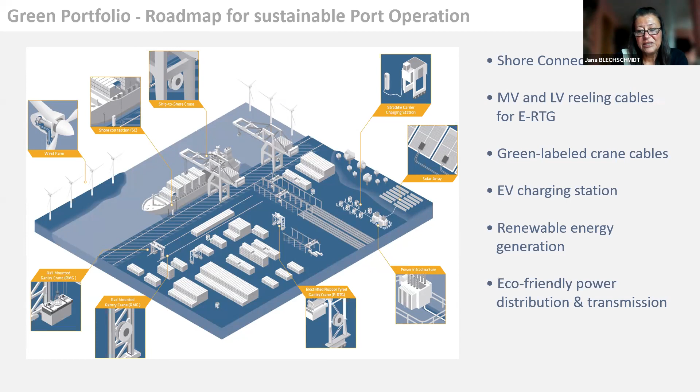Having said that, I would like to draw your attention today to our medium voltage reeling cables, because not all port operations require the same cable solution. That depends very much on the equipment we are driving. From the outside, power cables look pretty commodity and very similar, but looking in, you find a different level of engineering inside the cable, with the focus on best value for money.

Our PROTOLON cable family has a new member, considering applications for older cranes, cranes that are not driving too fast, like mobile harbor cranes that are not running long distances in the port - short for applications with moderate mechanical stress. Our PROTOLON SMK 200 is made and available for these applications. PROTOLON SMK is our classic and most popular reeling cable for operations with high and highest mechanical stresses.

For the increasing number of high-speed applications in the port, such as ASCs and ARMGs, we have developed our PROTOLON SMK HS, with the HS standing for high speed, which is the big sister of our classic PROTOLON SMK. We complete our PROTOLON family with our premium solution, PROTOLON IQ, which is a cable monitoring system that observes itself and its ambient conditions during operation to prevent the cable from failing.

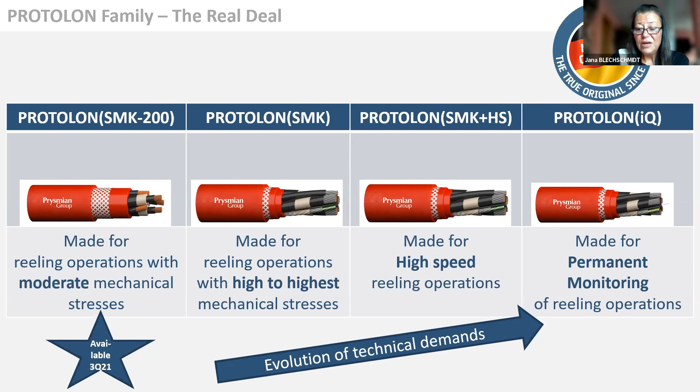The whole PROTOLON cable family is engineered and 100% made in Germany, from the copper drawing and laying to compounding and vulcanization. Now let's take a closer look at each of the products, starting with the new release PROTOLON SMK 200. The design of this cable is optimized for reeling operations with a speed of up to 200 meters per minute, and it can handle a tensile force of 25 newton per square millimeter copper conductor.

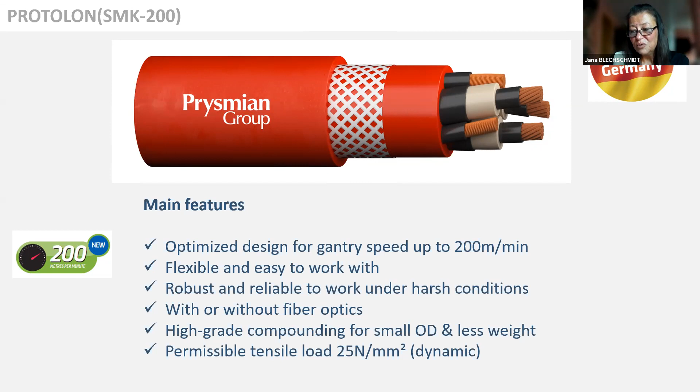Waiving features that are not needed in those moderate applications, the cable is focused to do the job: power supply to the crane. The cable is highly flexible and easy to work with. It's not compromising on reliability and performance. It works reliably even under very harsh conditions. As always, we use our Prysmian-made high-grade compounds for small OD and less weight. The cable is the perfect solution for low and moderate speed reeling operations.

And here comes our classic and well-known PROTOLON SMK. This cable has an unbeatable high number of references in the field all around the globe. It stands for reliability, long lifetime, and customer satisfaction. The design is optimized for reeling operations up to 240 meters per minute.

The cable is super flexible, built with innovative high-grade compounding, developed and made in our own compounding department. It uses state-of-the-art compounds for the insulation sheath system, and for that reason we are able to optimize the cable in diameter and weight. Compared to the previous generation of cables, we are saving around 30% of cable OD and weight.

The cable can handle and resist very high mechanical stresses, and we tailor the configuration according to your specific requirements, delivering it with or without integrated fibers, with twisted shielded pairs, with pilots, or any sort of control cores.

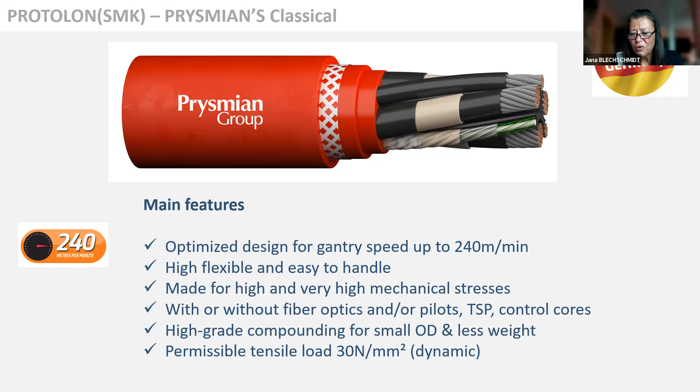The big sister to PROTOLON SMK is our high-speed cable, PROTOLON SMK HS. With an integrated support element in the cable center, we are able to increase the permissible tension of this cable by a minimum of 1000 Newton on top of what the copper can do naturally.

The other important feature is the very compact core assembly, core design. We are saving diameter by doing this compact inner cable design and give this saved room to the sheath system, in order to help the cable better handle all the stresses coming from the outside into the cable center.

Both features together result in a suitability of cable for very high speed operations. In fact, there is no speed limit for this cable. And of course, we also manufacture this cable with customized configurations such as integrated fibers, twisted shielded pairs, or any

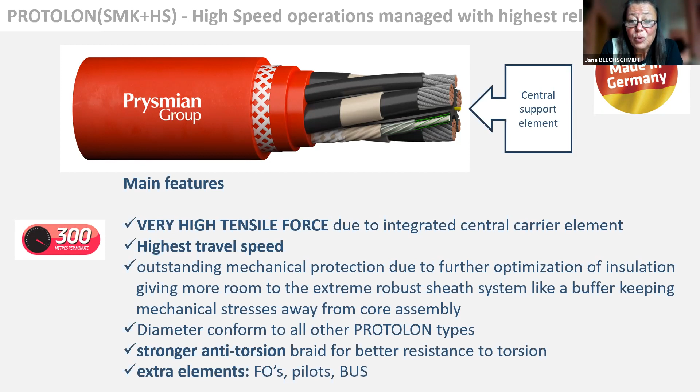Other sort of bus applications, pilots, and control cores. But nevertheless, all the three cables that I just showed to you are dealing with symptoms that are coming from the setup of the equipment. The cable that is made to actually control the symptoms, actually to control how it is treated, is our monitoring

cable PROTOLON IQ. Faster, greater, broader, plus the fact that operations of cables are almost permanently at the specification limits, is causing a tremendous extra stress to the cable. The tolerance of the cable to handle stress peaks that are coming, for example, from installation failures, from incorrect machine setup, or insufficient maintenance even, is shrinking. And of course, that results in sort of cable's lifetime limitation or shortening.

To better control that, and we can't control what we can't measure, we have developed our monitoring system called PROTOLON IQ. PROTOLON IQ is a revolution because it's more than just a cable. It is composed by 3 main elements. First of all, enhanced PROTOLON cable, because we are embedding, as you can see on the right side of that

slide, a special sensor fiber that is dedicated to measure mechanical stress load. On top of that, we have a measurement device which can be installed either in the e-house on board of the crane or in the substation where your other equipments are located. The device is then connected to the fiber inside the cable through the local fiber infrastructure.

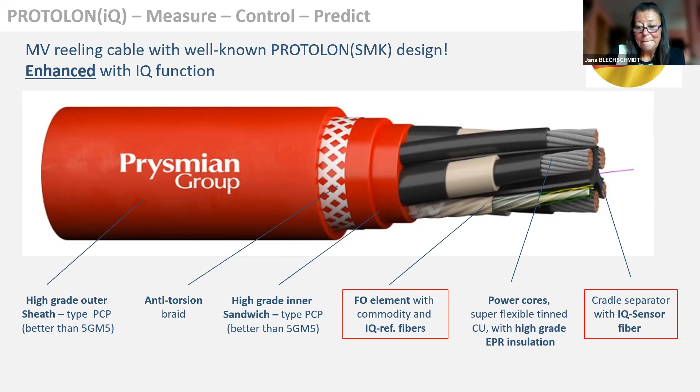The global warming is, it's kind of funny, opening the Northern Sea route, which means there are a lot of requirements coming from the field today for so-called icy cold operations, up to -50 degrees, fully flexible. And we have adjusted all our cables that I showed you before to an Arctic cable design. It's still a PROTOLON SMK, but we have developed special compounds that can deal and resist with this very cold and strange ambient. These cables are excellent, flexible, also at temperatures of -50 degrees, resistant to oil, also on UV, which is also a very present factor in the north, to moisture and water.

And we have this cable available for all crane applications, not only the main power supply, but also the spreader reeling cables, the festoon cables, the chain cables, any sort of moving part on the crane is also available for -50 degrees. And to complete the PROTOLON family, that brings me back to the very first slide, the green port slide.

Environmental friendly feeding of docking vessels is a topic which we are having a focus on with the next presentations that we will see. We have developed a PROTOLON cable, which we call a shore connection cable, that is used in this application. To be honest, this application is not really looking very demanding, but this is very underestimated because

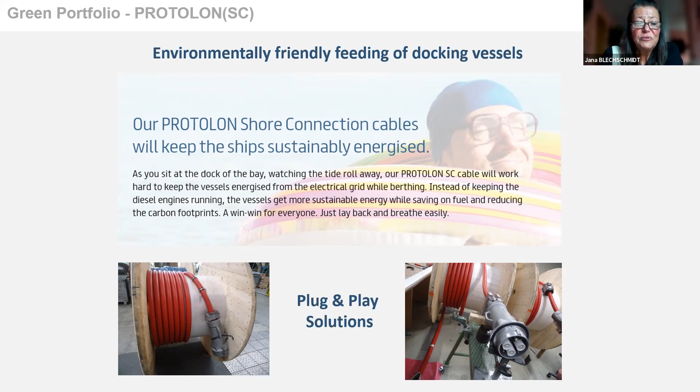And that brings me to the end of my presentation. Andrea will give you a closer view on our shore connection cables before we continue with the other presentations.

Thank you very much, Jana. A very clear presentation. Before we go to Andrea, two questions. The first one refers to the IQ software, the IQ fiber addition to the cables. This sensor fiber cable takes measurements all through the cable, I suppose? And can that facility be added to all your different cable designs, or is that only for one cable design? That's my first question.

At the moment, we have this technology on the main power supply cables, because these are like the umbilical cords to power the crane, which is the most relevant application in the field. So right now, we are focused on these medium voltage reeling cables for the power supply of the crane.

But you could over time add it to other types of cables as well, presumably? It's a matter of product development, certainly, right? Yes. Okay, the second question is, you elaborated on that already a little bit.

You can measure the stresses, the twist, and sort of predict when stresses are going to rise. So that information comes onto a computer screen somewhere. What exactly is the total package of information, and in particular what the software would advise you to do with that information, like stop the crane or replace the cable? What exactly are you trying to achieve with that information?

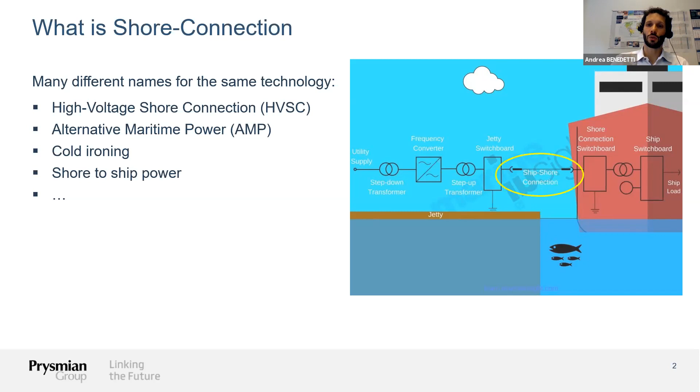These are all different names and terms indicating the same technology, serving the same purpose: to connect the ship to the main grid while berthing, and to provide the energy demand to the ship from the grid instead of using diesel engines. So the ship can shut down the diesel engines and get the needed power from the main grid.

What are the advantages of this kind of technology? The port operator can reduce carbon emissions, reduce fuel consumption, and last but not least, reduce the noise connected with these big vessels that are polluting the air, the water, and the overall environment of our ports nowadays.

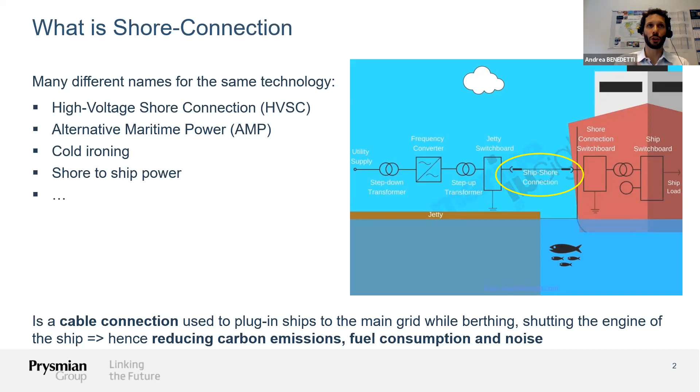So many different systems are available on the market, but what they all have in common is that they all need a shore connection cable. Coming back to what Jana said, it might seem that this isn't a demanding environment for the cable, but I can tell you this is not the case. We don't have just one solution or technology; we have such a wide spectrum that we need to think about all the ways the cable will be used and put under stress by different environmental conditions. The good thing is that for all these systems, we have just one cable type that can be used across all these technologies, and I'll show you in the next two slides what we're talking about.

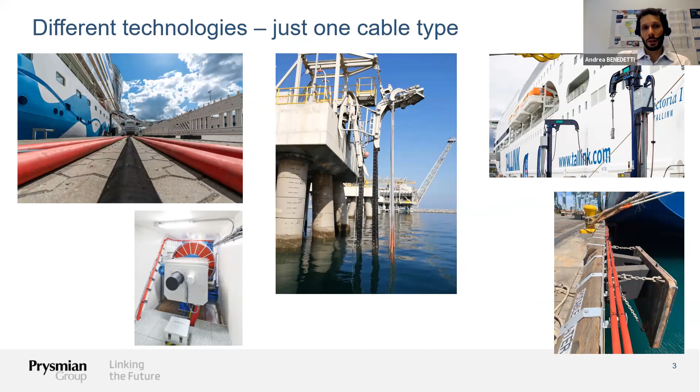One cable, different technologies, one cable, which is the PROTOLON SC. SC stands for shore connection. We do, however, have different voltage ranges. So the first cable that I'm showing you here is a medium voltage cable.

Medium voltage cables for cruise liners or for container vessels usually have electrical systems operated on 6.6 kV or 11 kV. To cover this range, we have medium voltage cables that cover 10 kV to 20 kV, and the construction of these cables is pretty much the same. What changes is the dimensions, of course.

They all have first of all 3 power cores in the center, made of flexible bare copper conductor class 5. Class 5 indicates that the copper conductor is highly flexible, suitable for bending and for continuous reeling application. Around the copper conductor is a triple layer with an inner semiconductive, an insulation layer, and an outer semiconductive. This is the classic design of a typical medium voltage cable.

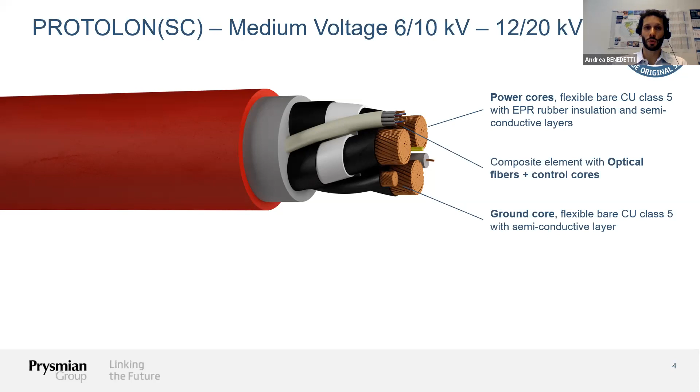In one interstice we have the ground core, serving as protective earth, also made of flexible bare copper conductor class 5 with a semiconductive layer. In the other interstice, this is quite interesting: we have a composite element made of optical fibers and control cores, combining optical glass fibers and standard copper control cores in one bundle. This is used to transmit both signals and data at a high rate.

Around the core stranding, we have a first sheath of rubber material based on EPR rubber, and here it is important to have a water barrier. Moisture or even water is present in ports, so what we need to avoid is water or moisture entering the cable, otherwise this can be dangerous from the electrical point of view. The combination between the inner and the outer sheath makes the real difference in whether the cable is water resistant or not.

In this case, we have a combination of inner sheath based on EPR rubber and an outer sheath based on CPE rubber. This outer layer provides water protection, but is also abrasion resistant and resistant to UV and to the mechanical stress related to typical reeling operation. We need a tough outer sheath that protects the cable from damage through dragging and reeling on the reeling system.

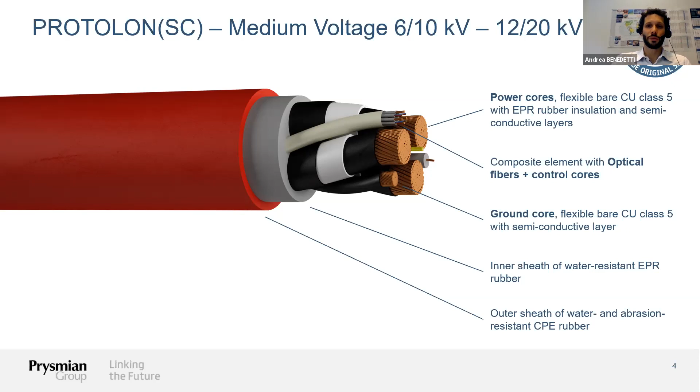So this is the typical design of a medium voltage cable. We also have this design in a low voltage configuration, which looks slightly different. We also have power cores made of flexible copper conductor class 5 with EPR insulation. Since we are in low voltage, we don't need semiconductive layers, so we only have an insulation layer. In the interstices we have 2 ground cores, also made of flexible copper conductor class 5.

In the third interstice we have a combined element with 4 control cores, or even higher if requested by the customer. In this configuration we don't have fiber optics, but again this is a choice of the customer or of the system where we are delivering our cables to.

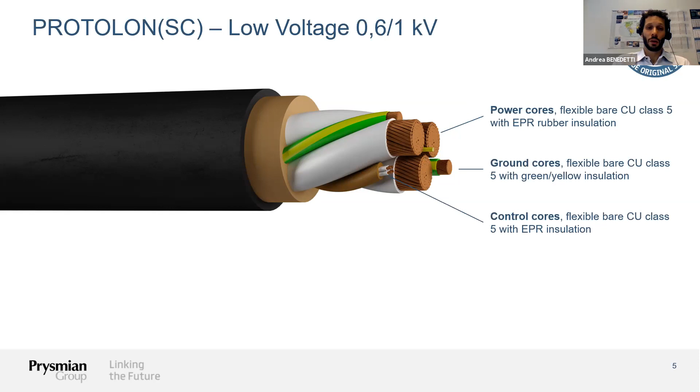For the inner and outer sheath, we have the same materials. The only thing that changes is the color of the outer jacket. Typically red is connected to danger, so this is used for medium voltage cables, while colors like black or yellow are used for low voltage cables. In this case, the choice of a black outer jacket, also based on CPE rubber, is water and abrasion resistant, while the inner sheath is water resistant, giving perfect water submersibility. So the cable can be permanently laid underwater if the requirements are such.

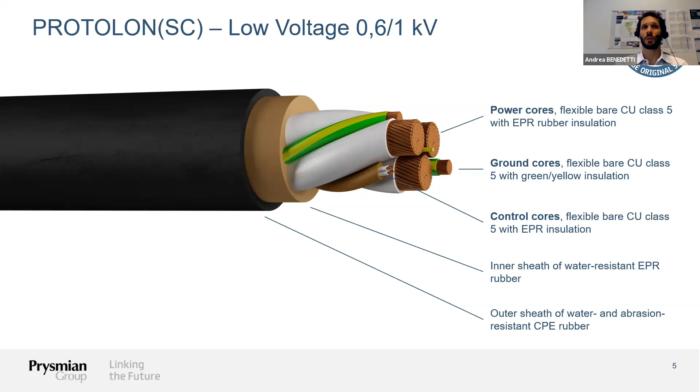And then we move on to the next slide to summarize the main features of these cables. The first feature that I want to mention, this is very important: all these cables that I just showed you are all compliant to the international standards, and the international standard for shore connection system is the IEEE 80005. It is definitely important that we are compliant to this standard, not only from the design point of view, but also from the testing point of view, to guarantee that our cable does maintain a certain quality level.

Throughout the production process and throughout the years as well. To do so, we also had the support of Bureau Veritas in this case, who also tested independently the cable and certified these cables as being according to the IEEE 80005.

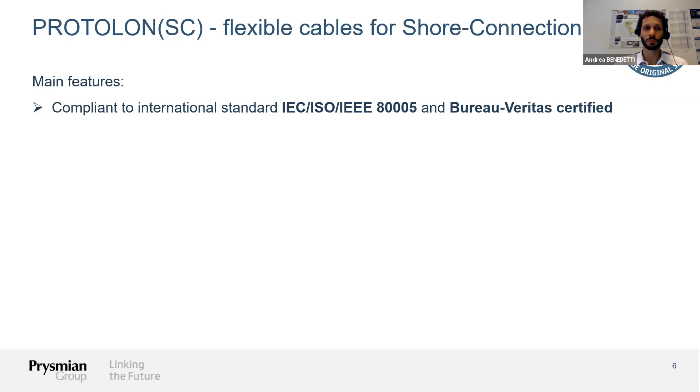The next thing, which is quite important, is that the cable has to be suitable for all vessel types, regardless if we're talking about container ships or cruise vessels or a ro-ro or ro-pax vessel, and so on and so forth. Why is that? As I showed you before, we have different technologies, but the cable is the same. So for this reason, the cable needs to be used for different ships coming into the port.

And then the next important point is the fact that the cable is designed for reeling application, for reeling operation, but is therefore also suitable for semi-fixed systems. The reeling application is definitely the most demanding application that we have in this field, because the cables are being reeled on and reeled off quite often, maybe a couple of times a day, also subject to tensile strength or to tensile force. So this is definitely the application that we need to meet in order to make sure that the cable is suitable for this kind of environment. And then everything else will be basically a class lower in terms of mechanical stress onto the cable.

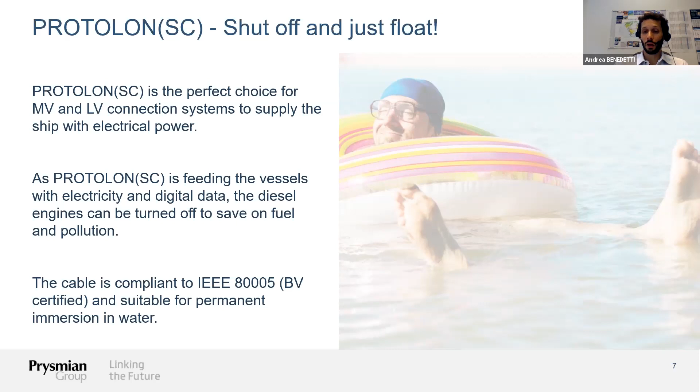And everything that we do is compliant to the industry standards. So in this case, the IEEE 80005, Bureau Veritas certified, and suitable for permanent immersion in water. So this is everything I had to tell you today. These are our contact data if you want to reach to us. And then now I leave the word back to Antoine.

Thank you very much, Andrea. Very clear.

I have two questions for you. The first question is, there are small ships and big ships, and the bigger ships presumably would have much higher power and voltage or power requirements than the smaller ships. So they might require multiple cables or multiple supplies, or at least a lot more kilowatt hours or kilowatts than the smaller ones. How do you deal with that?

The second question is on the plug side. With regards to the ship, since it's Bureau Veritas verified, I'm sure the plugs for the ships are not really a challenge. But I would imagine that the plugs or the terminations and the connections on the land side, with the substation or with existing cable systems, the variety there would be much wider and much higher. How do you deal with that question? So those two questions, please. Thank you.

Thank you for the questions. Both questions are in regards to flexibility of the system, of course.

To your first question, yes, you're right. Different ship classes require different amounts of power, and in that case it is quite typical that more than one cable will be laid alongside each other. We will see later in the presentation that a typical configuration has either 2, 3, or even 4 cables laid in parallel, exactly to provide this high amount of energy to the ship.

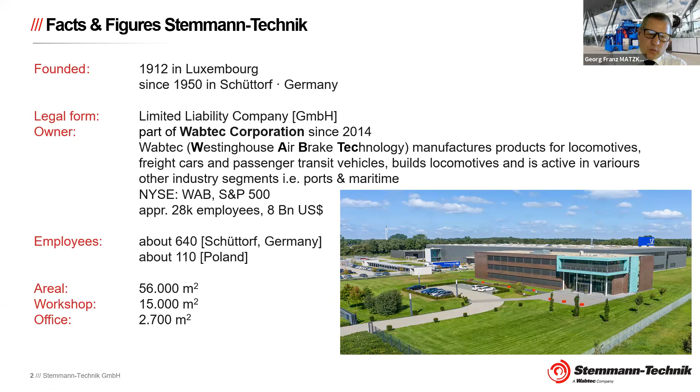For electrification and sustainability, I will talk about cable management for shore power. Thank you, Anthony, for giving the audience a rough idea about who we are and who I am. I'm working for Stemmann-Technik, a German company. We were bought a couple of years ago, in 2014, by Wabtec, that's Westinghouse Air Brake Technology, a railway company. Stemmann is a comparably small company with a couple hundred people working in Germany, and our mother company has close to 30,000 people, a lot in railway. So we are just a small part of the complete group.

Talking about shore power and cable management today, a bit repeating what Andrea already told you. So what's the challenge here in shore power in general?

There's some names and nouns being aware in the market, like Kyoto Protocol, Paris Climate Conference, and IPCC. So what is this about? Practically speaking, a couple of years ago at the Paris Climate Conference, roughly 200 countries decided we are willing to reduce the rise of temperature to a maximum of 2 degrees Celsius above the pre-industrial level. This is so important because the IPCC found out that it's extremely likely that humans were the dominant cause of global warming in the last 60 years. So if we don't care about our planet, then that's it, practically speaking.

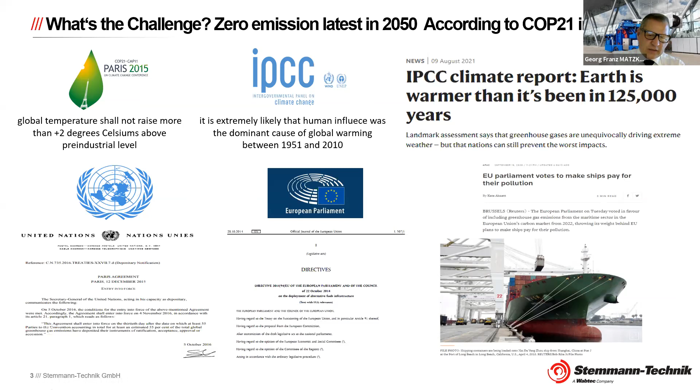A couple of things happened, and we are looking forward to governments even trying to put some more pressure, not just nice words on the market. They even say we are looking to make you pay if you keep on doing pollution. So if we want to go green, if we want to reduce carbon dioxide, there are a couple of things we can do in the ports and maritime business.

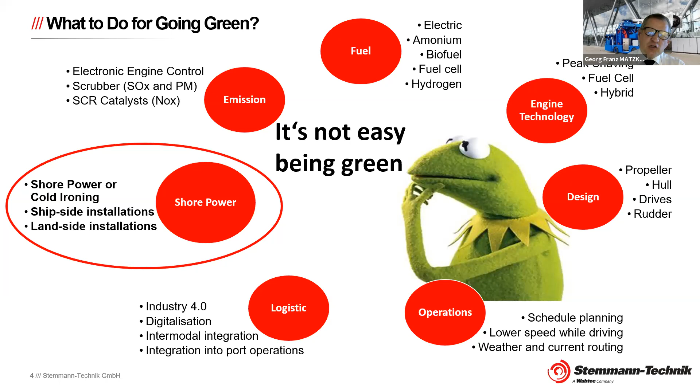Don't worry, I will not talk about everything here. I'll reduce it to shore power, as you see on the left side, both the ship side installations and the land side installations. But of course, there is much more that can be done at the moment.

To give you a better understanding from a general point of view, what Stemmann is doing is the cable management, which means covering the distance between the shore and the ship side, or the ship and the shore side. However, we are not doing the substations, we are not carrying the grid, we are not electrifying the complete ship. We're just doing the handover, and it can be very individual.

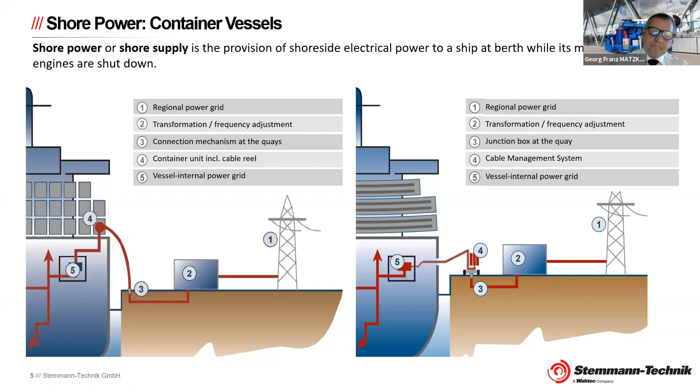The reasons to go green, I just try to sum it up. There are, to me, 3 core reasons. First is I should better do it, because my stakeholders, my local and national politics, my NGOs say you need to do it. We are your voters, we are your neighbors, we are your friends, we are your employees, we want you to go green, which can put some pressure on the ports and on the ships too.

Some of these people say, well, there is quite some funding at the moment, so maybe I should just grab the money and do it before there is no funding anymore in the future. However, second point could be: I want to do it. Usually money counts, and if there's a chance to get things cheaper, people just run. So there are some situations in a business case where it might just be cheaper to go for shore power compared to staying on diesel, especially when the price per kilowatt hour of green energy is cheaper than the diesel to care for.

At least I can tell you for Germany, this doesn't work at all. In Germany, the price for diesel is much cheaper than for green energy. So there will be some more reasons to do that. One of them is corporate targets. If you have a look into sustainability reports from the big companies, I just read the other day that MSC is showing it, APM is coming up with it. They say we want to go green, we want to go on a zero emission strategy until 2040, 2030, others even earlier. So this could be one of the targets, the reasons to do so.

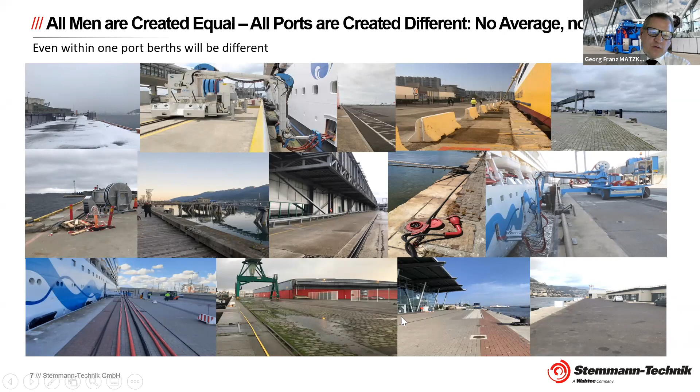Giving you a quick overview, I've shown here some applications running worldwide, whether it's cable cranes, as you see in the upper left, or running on a container vessel, as you see on the right upper part. It could be done on a small cable reel placed on the port for offshore support vessels, for some cargo vessels, or for some bulk carriers, or maybe for cruise ships, as we know it from Hamburg, Kiel, Rostock, and others.

We just handed over in an FAT, which happened last week, the latest shore power solution for the port of Southampton, which will be shipped on Monday next week. So there is another solution coming from Stemmann-Technik which will run in the world, and we are really proud of this one. And coming to the last picture on the right bottom here, this is for a RoPax vessel in Poland. So it doesn't need to be a movable solution only for cruise - you can also use this for RoPax or maybe for car carriers.

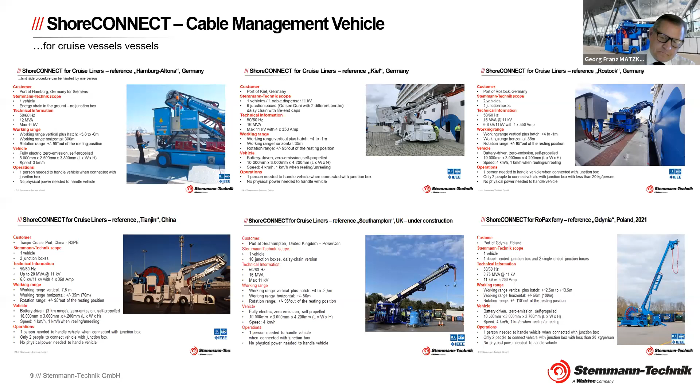To sum up, the world is really facing massive problems, ecologically and economically, and it's time to act right now. If we really want to reduce the increase of temperature, and the aim actually is 1.5 degrees, not 2, then we need to do something. The governments, I mean, even the governments are acting meanwhile with restrictions on money, with new laws.

We are aware that although every man is created equal, practically every port is created different. So we need to put a clear point on this: we need to do customized solutions. We cannot just copy paste from one berth to another. And that's my last words: I believe it's not easy being green, but it's really worth it. Thank you.

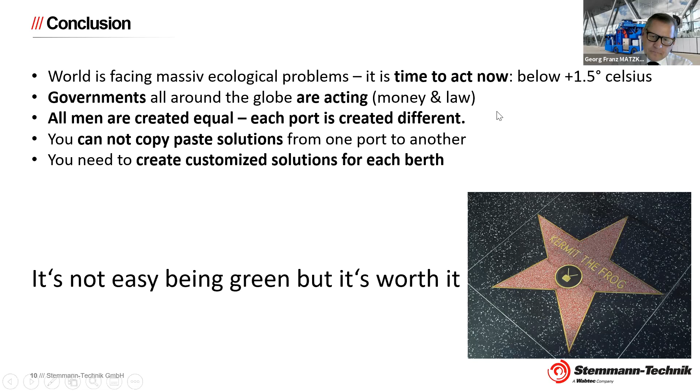Thank you very much, George. That was very interesting. So you're working on a whole range of different technical solutions for different situations, essentially, if I understand you correctly, right? I can see, yes, every port is different. Also, every berth is different within the same port, which makes it more complicated. And I would assume that the most complicated situations are actually the ports that are the oldest and the most varied in the types of berth and infrastructure they have within that port area, right?

Right. And if I look at container berths, one beautiful thing is, of course, there is a distance between the fenders and the edge of the quay, which is not the case in general mixed cargo berths. In dry bulk berths, that's typically also the situation. In those type of berths, we also have the cranes running on rails, and along the rails there is a channel where the normal cables are running, feeding the cranes. But in old mixed cargo berths, there is none of that - no cables in the surface, no rail systems, nothing by way of overhead structure. So you need to just lay out the cables on the surface, running from some point to the ship, in which case there's no protection for the cables, and the trucks have to drive right over the cables.

What is your advice for a berth like that, generally speaking? Okay, thank you for the question, Anthony. I mean, usually what we see is that the cables are brought from the substation underground to a junction box, which is placed on top of the quay, inside the quay, next to the quay. So the main problem we are facing in shore power, with what you were asking, is just the connection between the junction box and any kind of cable management system.

Thank you very much. I hope everyone can hear me and everyone can see my presentation. Great, thanks, Jana. Yes, thank you for having igus on this panel, and thank you very much to all of you for introducing this topic.

That lets me jump in right into one topic. I want to present you a little bit about shore power systems for container vessels, and especially about our igus mobile shore power outlet. First of all, it's similar to what George just mentioned - it's the overall context of shore power for a special terminal.

So when we're thinking of a container terminal, it's all about profit. It's unloading and loading vessels as fast as possible. Safety first, yes, but then comes automation. Electrification is happening already - all the port equipment is going to be electrified, no matter what. 4.0, big data, it's happening, and it's probably overtaking everything else.

But going green, zero emission is a big target for the future, for all of the ports, and there's commitment from terminal operators, from shipping lines, and from the port authorities. But when we're thinking about shore power, it somehow has to fit into this environment, and we need to address the overall context.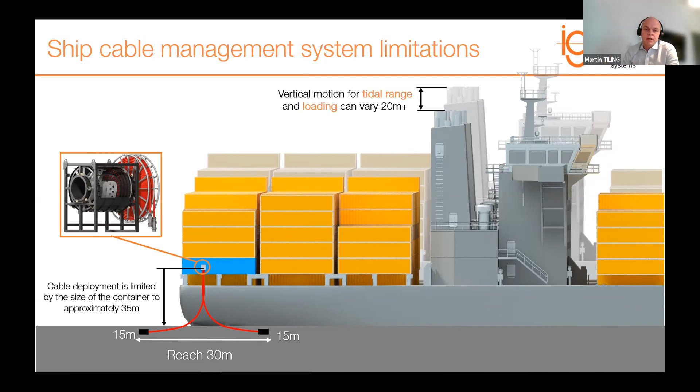of the vessel that is needed to compensate this movement. And then you have limited reach for the plugs to plug them in at any place. That leads to the main problem of all the shore power connections, not only for container vessels, but we see this also on cruise vessels. We have different solutions to address that, but the connection dilemma is really a key issue for all of the ports designing a shore power system.

Every day you have different calling vessels in terms of size, berthing starboard, berthing port side, and then the location of the cable management system on board the vessel can be at various points as well. So in the end, you don't know where to connect the vessel. Not today, but not tomorrow either, and foreseeing the future with new vessels calling or new lines calling this berth, it gets even more complicated.

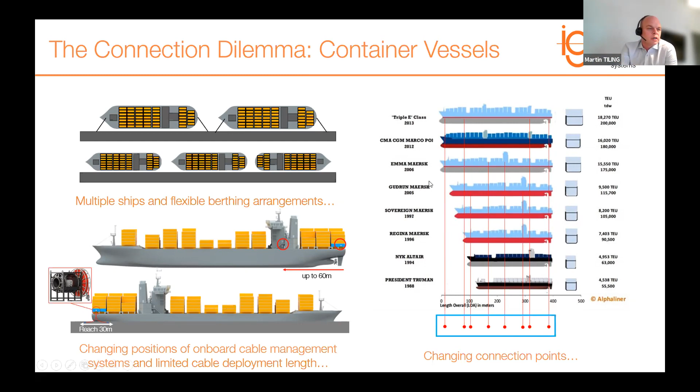How did it start, and what can we learn from the past? In the past, what we can see here is my colleague doing a connection in Port of Oakland in California.

We installed outlets in the terminal. But if the vessel doesn't line up, you either have to move the vessel or you need a lot of people coming out, and again, this is a 21st century modern container terminal.

How does it work with your operation? I don't think that many people coming out to do the connection is something you're looking for.

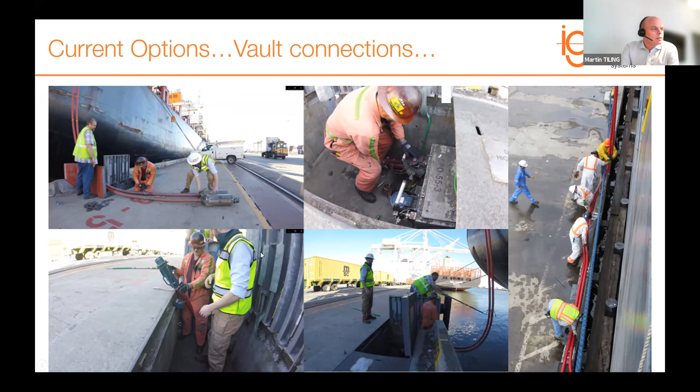If you think about the coverage you can achieve by placing an outlet every 50 meters, that doesn't only cost a lot of money, but also in terms of operation you create sort of red zones where you cannot connect. So in the end, you have to move the vessel or you cannot connect.

And even getting close to it, these cables are super heavy. They weigh 10 kilos per meter. These are 2 cables - it's not easy to move them.

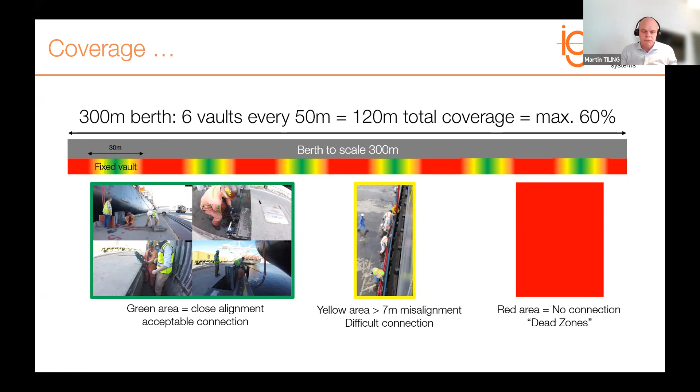You can do this coming from the vessel about 3 to 4 meters - that's fine, you get this done. But afterwards, you definitely need help. You need to call your colleagues.

When we look at the situation in California, some of the ports acquired sort of an extension system - we built one as well. But most of the time, the terminals look like this.

You simply don't have space. There's no space - George just mentioned this as well. It's really, really challenging. You have space about 2 meters, 1 meter 50. You cannot drive something there. There are bollards. It's impossible.

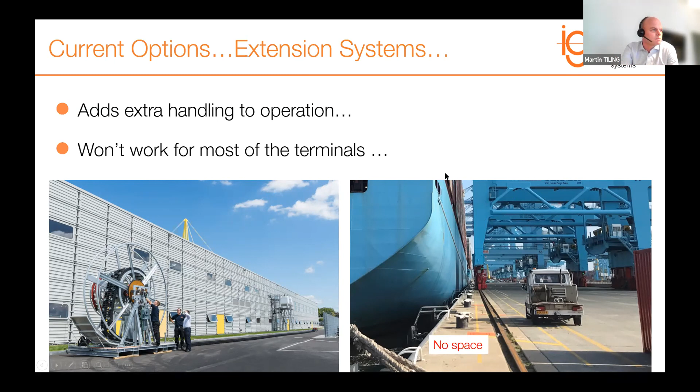What we learned from California is that the regulation got stricter and stricter. So by 2020, they had to connect 80% of the vessels. So they started putting an outlet at each end of the wharf or of the berth.

And then they realized, okay, I have another vessel coming, and the location is different. Then they added 2 more, then 2 more again. So in the end, they had 6 outlets. That's the main standard when you're looking into California.

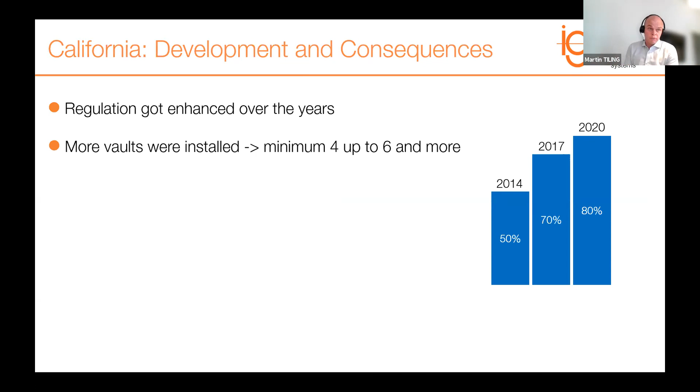6 outlets cost a lot of money - doing all the trenches, doing all the cabling, installing the outlets in the ground. But now, CARB, California Air Resources Board, requires 100% of connections.

LA and Long Beach invested approximately $150 million, and it seems like they have to invest the same amount of money again to reach this goal,

100% of connection. Why is 100% connection important? Because otherwise they face penalties for not being compliant with the regulations.

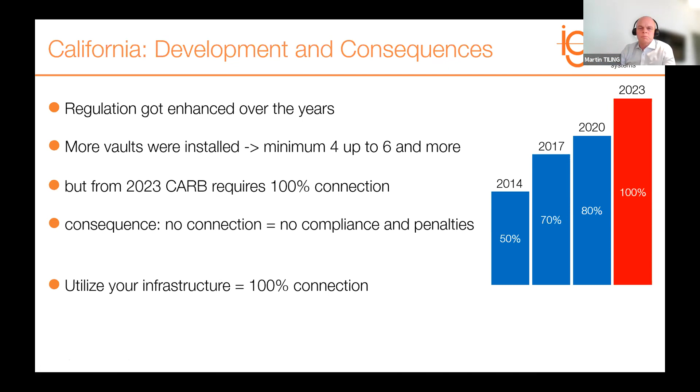But if you're thinking ahead, at different ports the key drivers for shore power can be different, but in the end you want to utilize your infrastructure. All the equipment you're installing - especially the electrical equipment, frequency converters, transformers, trenching, cabling - you want to get the most out of your money, and you want to utilize this because in the end it's all about selling electricity and connecting as many vessels as you can, achieving a 100% connection rate.

And also, 100% connection means 0 emission.

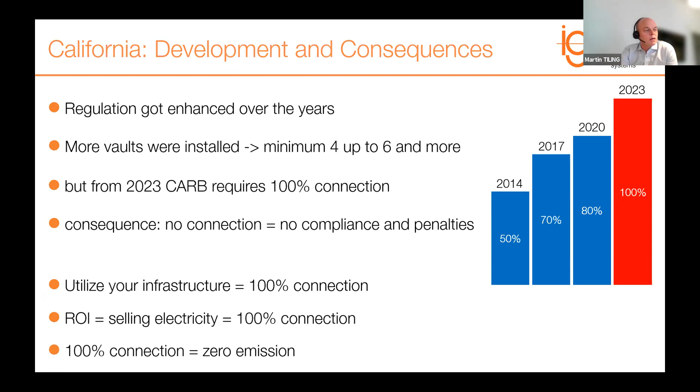No one has a crystal ball, and we need to plan for the future, so you need some kind of flexibility. When Port of Oakland came to us and said, we need a system that provides ultimate connection flexibility, we cannot add more vaults. One vault, including cabling and installation, is approximately $1 million. Maybe a little cheaper, but it's a lot of money for one vault.

But also they said, you can't make a Swiss cheese out of my terminal. There are cranes traveling over the deck, and there's a lot of steel in the ground, so it's not easy to dig trenches and holes into the terminal. And they wanted a one-time investment for 20 years of lifetime, so one and done.

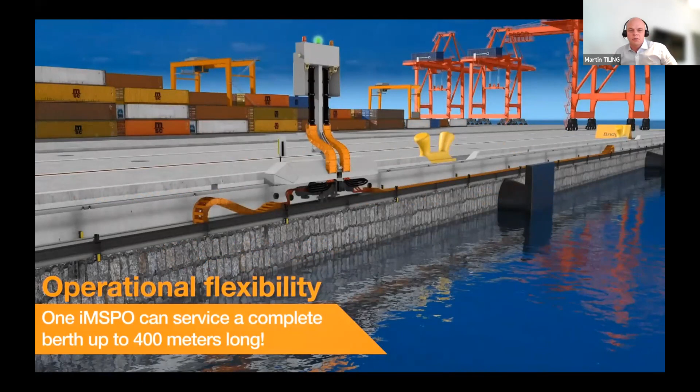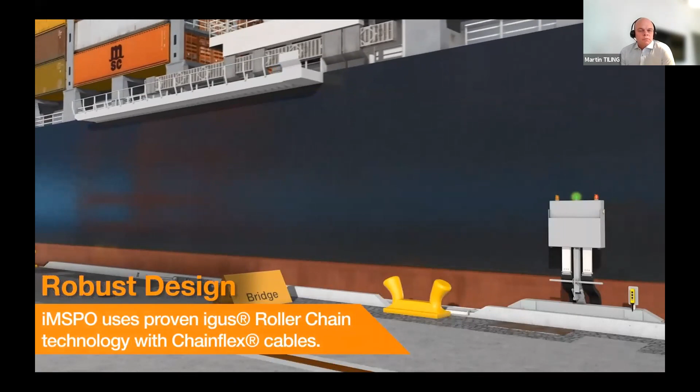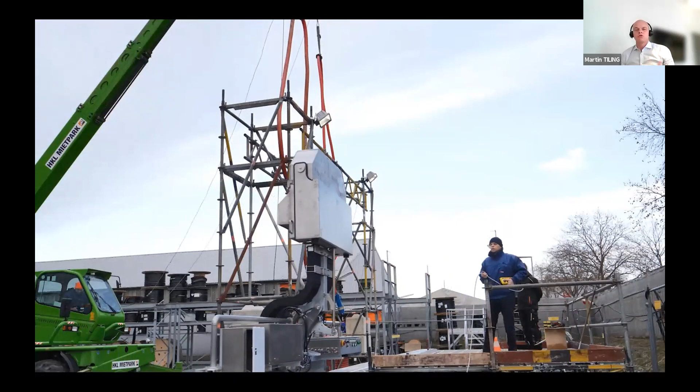So we started to analyze, and as mentioned, we went there, did our studies, did the plugging, understood operation, learning how this could be done. And the only solution that was acceptable was to put a track element outside the trench, with a mobile shore power outlet that travels along to bring shore power to the vessel, rather than moving the vessel to shore power. The next step, after designing and proving this concept, was building a system.

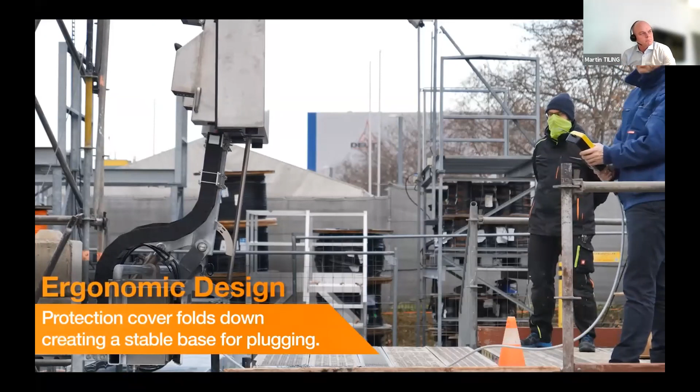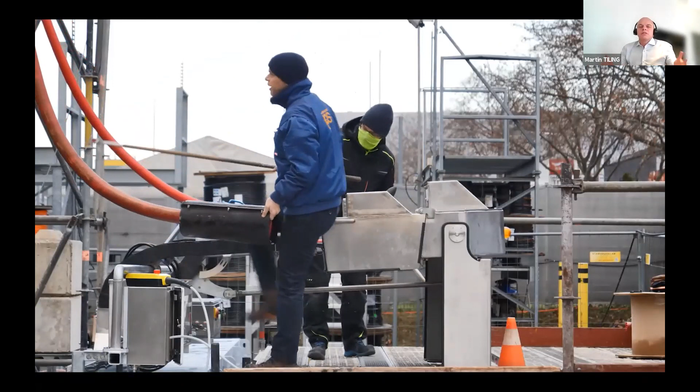In our factory in Germany, we created a test stand and installed a fully functional system with 20 meters of travel, because everything is super heavy, everything is big. So it's a real challenge. It sometimes looks nice on paper, but you need to do the real thing to learn what it means to do this connection, and to prove that every single step is working, because out there it has to work.

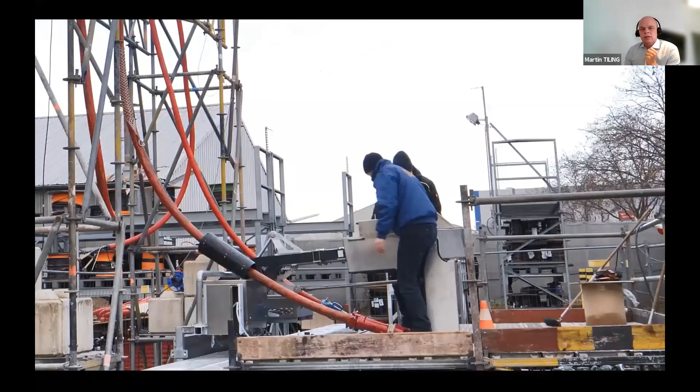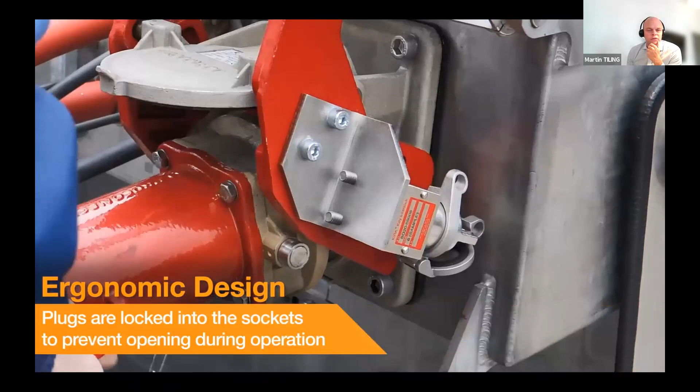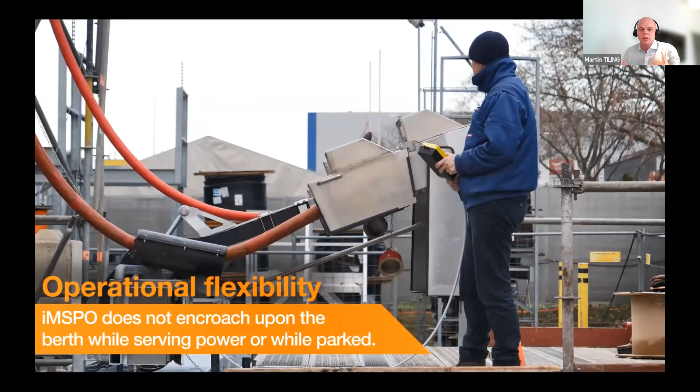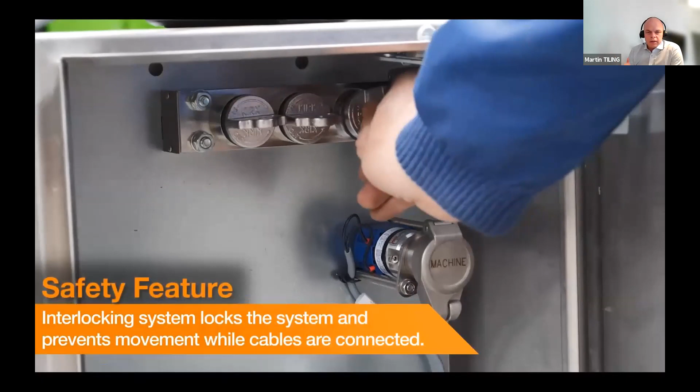The good thing is we have an international standard, and we can follow a lot of guidelines in terms of safety and connection procedures to make the system safe. And the good thing is it's working. Shore power has been used for many years and has its procedures, working safely. So it's not a brand new technology, but the question is how we can improve it, how we can be innovative to supply a smart infrastructure for the needs of the future, to get the most out of your money and achieve 100% of connections.

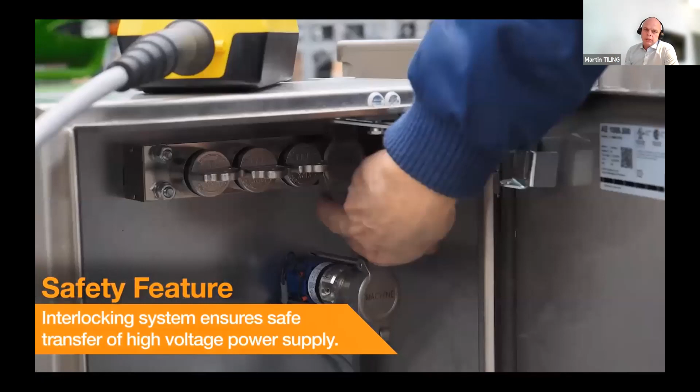As you can see here, we have also established a Kirk Key mechanism to avoid the system being powered on without being correctly connected, or that you can disconnect while the power is still on.

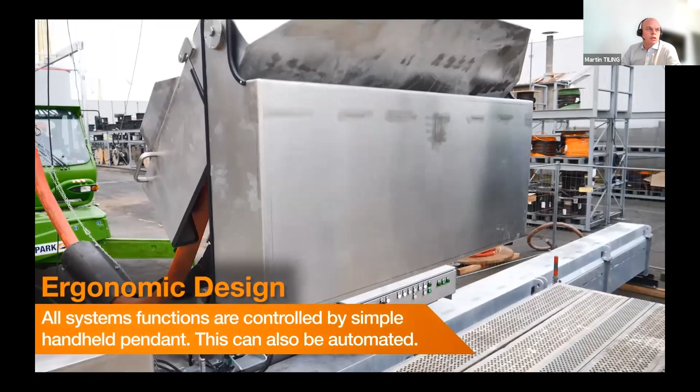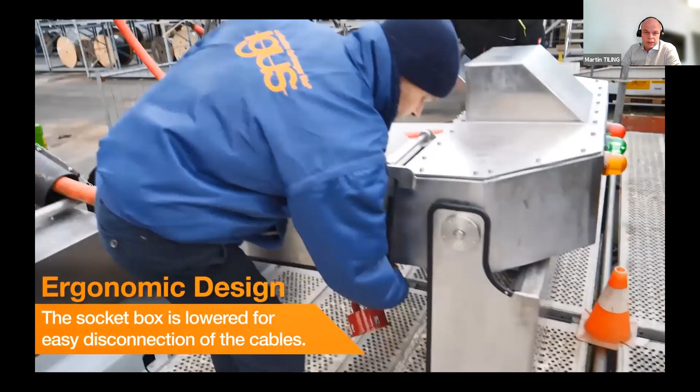These procedures are all well established, and in all shore power systems you will find such methods. We are very happy to install our first systems in Port of Hamburg. It's very exciting for us, a great honor to do so, and we're looking forward to seeing it running on a terminal.

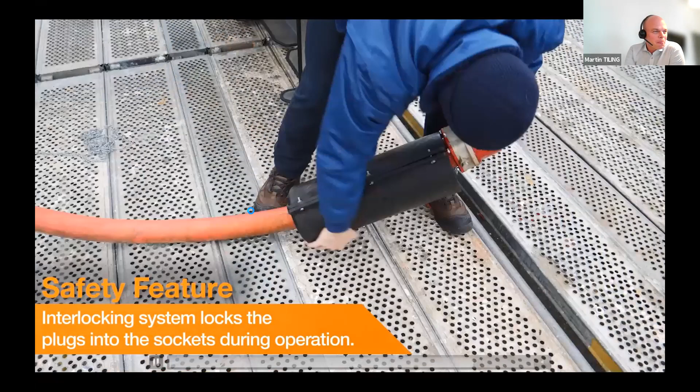One important issue is installing something outside the terminal. We make it flexible, but you also need to make it safe. It's a very big challenge to find a good solution for each port, because there is no port like another, just like mentioned before. So analyzing the terminal and getting experts on board in each field, from cabling, cable management systems, but also from protecting the system.

We collaborate here with Shibata Fender Team, one of the two leading fender manufacturers worldwide. There are many different solutions for how you can protect the system. What needs to be assured is that at 100% compression of the fenders, which is what they're designed for, the system is protected and not damaged, and we can achieve that. We have studied many different ports together with Shibata to achieve this goal, to make a reliable one-time investment solution for the future of the ports.

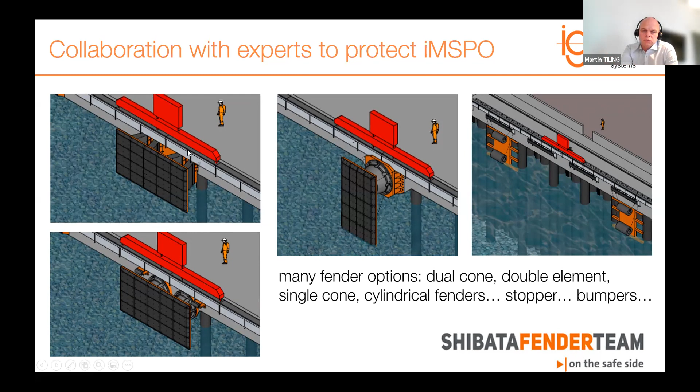To sum up, we designed to this criteria: IEC 80005, sort of the standard bible, where you find in the different annexes the requirements for different vessel types. We designed this according to the EU Machinery Directive, corrosion protection C5M—the highest offshore corrosion classification—IP66/67 for electrical components, Kirk Key integration, as well as push-pull force detection to measure the safety of the system, and clear signaling status. This can be adapted to each country's certification requirements, and we are also doing certification of the overall system with DNV in the next months.

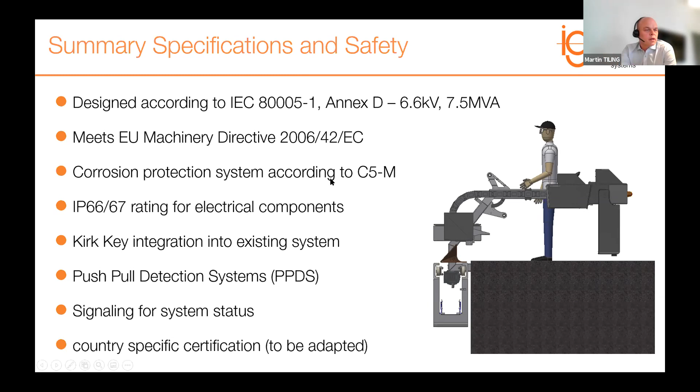Igus is a family-owned company located nearby Cologne. Frank, our owner and CEO, is working right among us. We are more than 4,000 people worldwide. Our biggest offices next to Germany are our headquarters for the Asian region in China, as well as Singapore.

And certainly the States and Rhode Island. We have done many shore power systems already for different vessels, and you need to do a good study to find the right system. We are very excited about the development and the goal of going green and zero emission for the ports, and we hope we can contribute a little bit to this goal. Thank you very much.

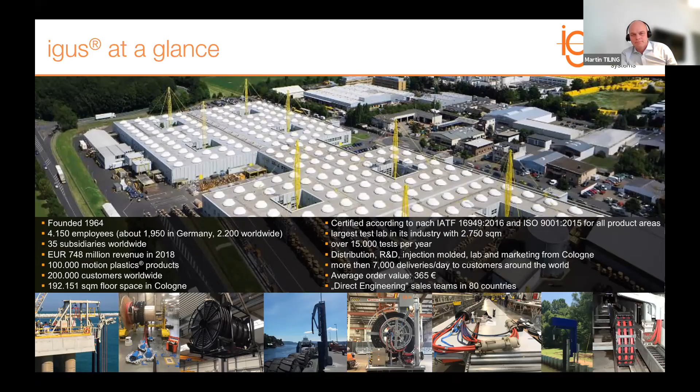Sorry, Martin, I was offline, so I'm sorry. Thank you very much for your presentation. Very interesting, and it raises a lot of questions from my end, at least. I think the concept is very clear, and if you were to apply this to other types of terminals other than container terminals, let's say general cargo berths which have very limited fenders, you need to come up with a solution which also addresses the fender challenge. Is that correct?

Yeah, absolutely. We always have to look at the power consumption of the vessel. So less power consumption - cargo vessels don't have the power consumption of a container vessel. They have much less. That means less cables, or even less cross section, which means smaller systems. And then we have to look also at the requirements. The vessels are not that big, the fenders don't compress that much - sometimes you just have bumpers, sort of.

So there are possibilities, and we have studied this as well to achieve this, and it is possible. But for such investments, you need to do a good study, and it's really worth it. A preliminary study can be done easily with terminal plans - if you receive overview plans and cross-section views, that works very well for a first shot.